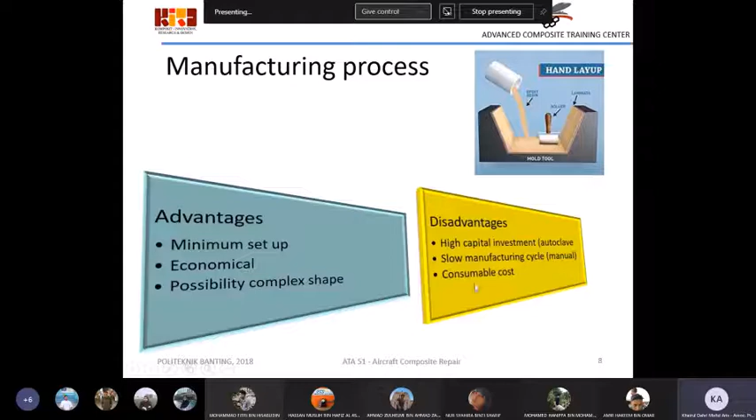Disadvantages: high capital investment, especially when you are using an autoclave for the dry layup, slow manufacturing process for the manual one, and consumable costs are very high. What are the consumables? The brush you need to replace every time you use it. The beaker you need to replace every time. Then maybe masking tape, and the glove, because you need to continuously replace them whenever you lay up.

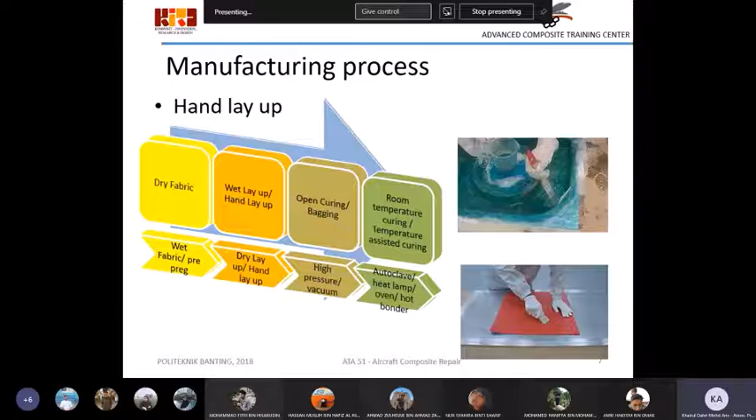But that is only when health is concerned. Some companies don't bother. They just give a pair of gloves and you have to use it for one day. So you take it off, and then you use the same pair after you finish your lunch when you continue your work. It's not very hygienic in that case.

Right, so how is it done? You have fabrics, you have resin that you need to mix, you put them together, and then you do the layup. Now if you stop at this process, we call it open mold curing. You do not do anything after the layup. However, if you add a plastic bag, breather, and additional parts, and then you do the vacuum, this is what we call a closed mold process.

So these are the two differences, whether you're going to do open mold like this, or you're going to do the closed mold like this, right? Now if you are using closed mold, what are the materials that we are using? You have the parts, you have the peel ply, you have the release film, you have the breather, you have the vacuum bag.

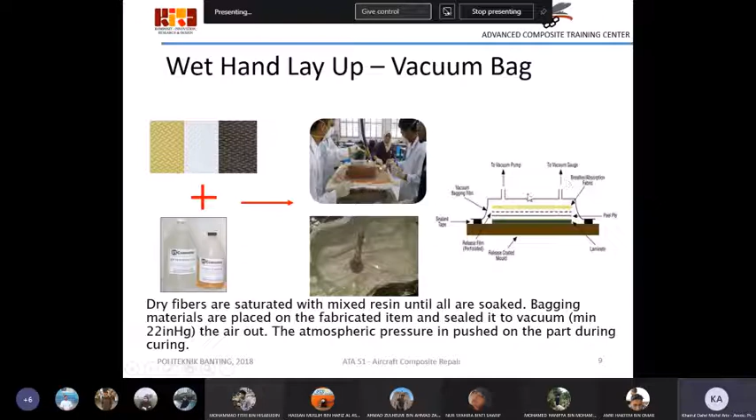So these, and also sealant tape, are what we call the consumable materials, which can only be used one time. And then you have the pump, and also a vacuum gauge. Let us see. So this is the process. You do the mold, and then you do the fabric layup. There you saturate the resin to the fibers, right?

And then you spread the resin. Once you have spread the resin, everything's wetted. Then you need to do the bagging preparation. This is the vacuum port. One goes for the vacuum gauge, vacuum line, and then after that you're going to do the vacuum bagging.

You need to have the release fabric or peel ply. You need to have the breather. You need to have the vacuum bag. You have the sealant tape all around, just to ensure that the vacuum is trapped within this vacuum bagging, right?

Do you record this class? Record, yes. Okay, okay. All right.

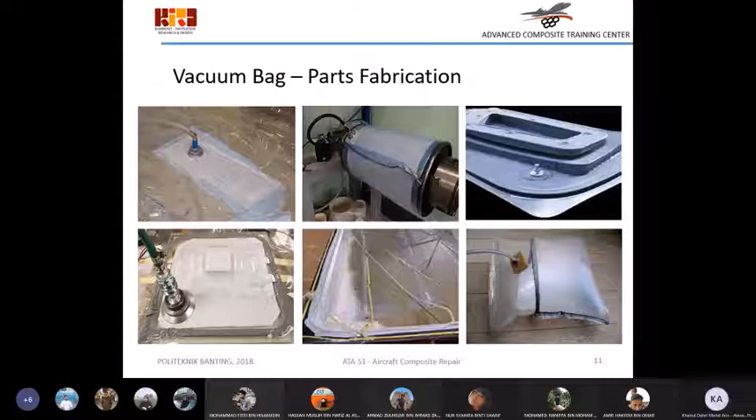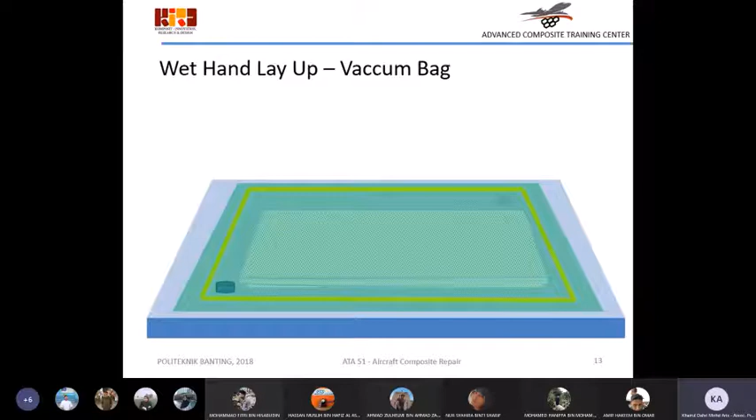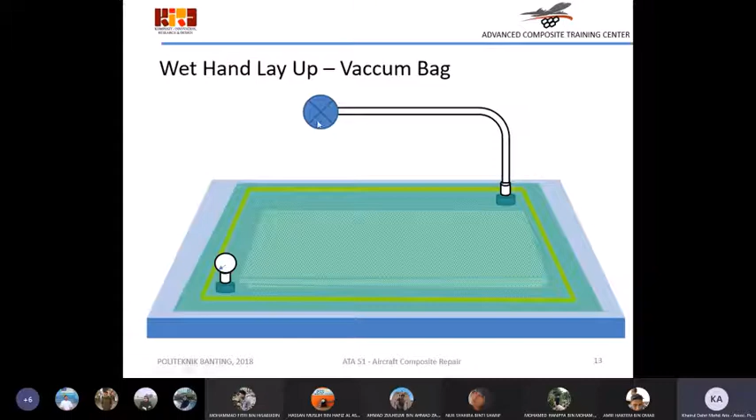But after you have your part, you put your sealant tape around, and then you put your peel ply, you put your breather, all the layers, and then the vacuum bag, the vacuum port and vacuum line. This is a closed mold. So for this closed mold, you need to have a vacuum, and you need to have this gauge here.

All right. So what are the materials that you are using? Just now I told you we have to use release film, breather, vacuum bagging. So these are the processes. This you need to remember, because it will be coming up in your examination. It will be coming up in your projects and also your final as well, midterm as well.

Okay, so you have the mold, and you have the parts that you laminated - the black part here. Remember from the animation, we have the sealant tape which seals the bag to the mold. This is the purpose.

And then you have the release film, which retains more resin on the laminated surface, but it's optional. Usually the release film and release peel ply serve the purpose of providing an easy release barrier between the laminate surface and the breather and bleeder.

So it's going to be a separator - the function is to separate between the adjacent ply, what we call the breather, from the laminate. Without having this release ply, once the resin cures, the breather can bond to your parts, and that becomes very time consuming to remove because you only want to have the cured part.

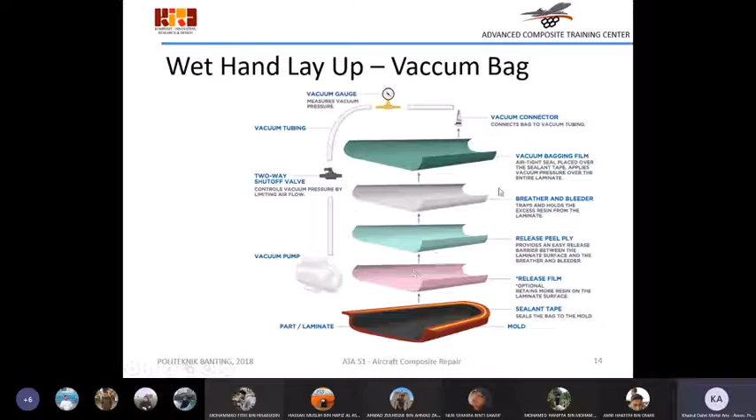Basically what we're going to do is replace this with a silicone bag. So this one uses the silicone bag, and it is reusable - it's not going to be a one-off usage. After you finish, you can reuse it again, for several times.

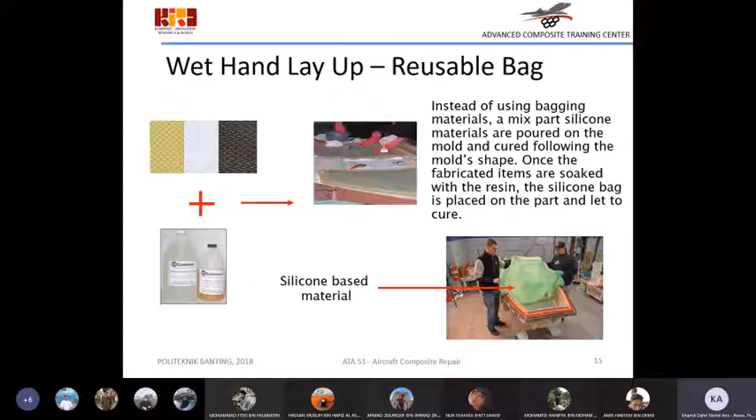Another thing is that you can do integrated parts - meaning from various molds, to make components, instead of only making one component. This is a seat for the MRT system - if you take a look, they need to put piece by piece if they do it manually or by hand lay up. But after they changed into silicone bagging, they can have integrated parts, which makes it easy for them to use.

Advantages: reduce the consumables, shorter preparation time.